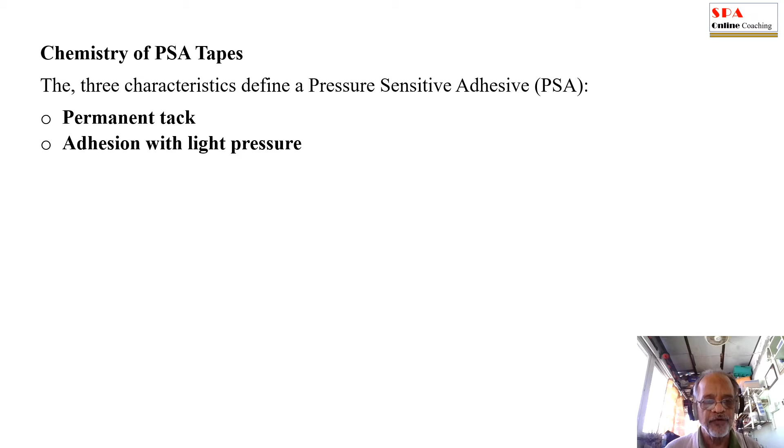The chemistry of PSA tapes. The three characteristics define a pressure sensitive adhesive: permanent tack, adhesion with light pressure, and no liquid to solid phase change. Unlike liquid adhesives, the chemistry in a tape is provided fully cured, so there is no additional curing that takes place to form a bond. The bond is created by using mechanical interlocking and electrostatic interactions at the interface.

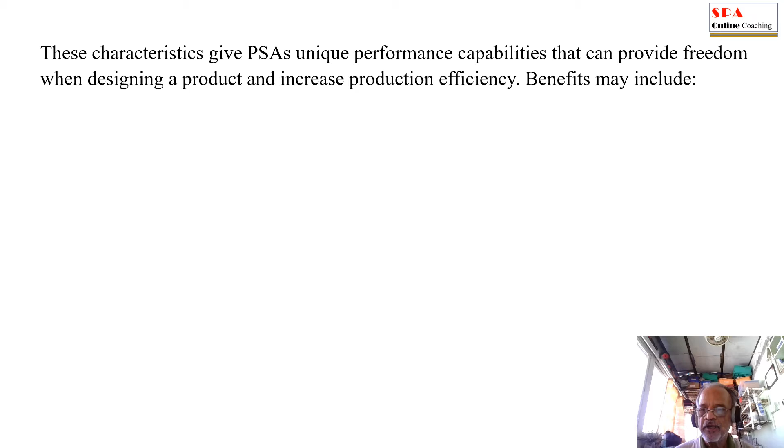These characteristics give PSAs unique performance capabilities that can provide freedom when designing a product and increase production efficiency. Benefits may include instant handling strength after applying pressure, easy to apply, consistent bond thickness, various thickness options with and without carriers, and functional foam cores,

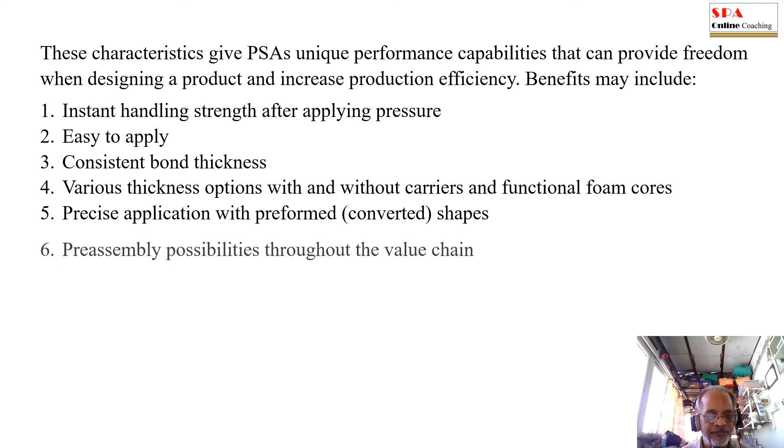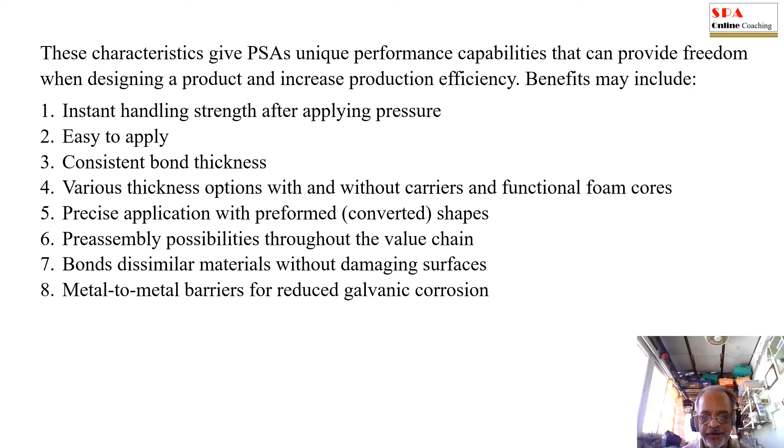precise application with preformed or converted shapes, pre-assembly possibilities throughout the value chain, bonds dissimilar materials without damaging surfaces, metal-to-metal barriers for reduced galvanic corrosion.

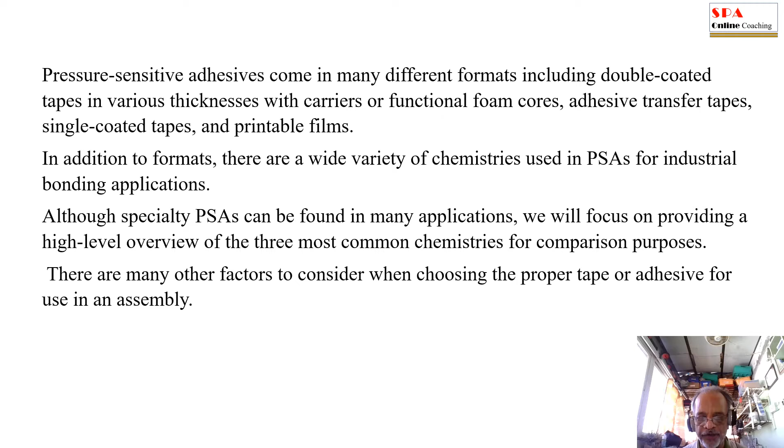Pressure-sensitive adhesives come in many different formats, including double-coated tapes in various thicknesses with carriers or functional foam cores, adhesive transfer tapes, single-coated tapes, and printable films. In addition to formats, there are a wide variety of chemistries used in PSAs for industrial bonding applications. Although specialty PSAs can be found in many applications, we will focus on providing a high-level overview of the three most common chemistries for comparison purposes. There are many other factors to consider when choosing the proper tape or adhesive for use in an assembly.

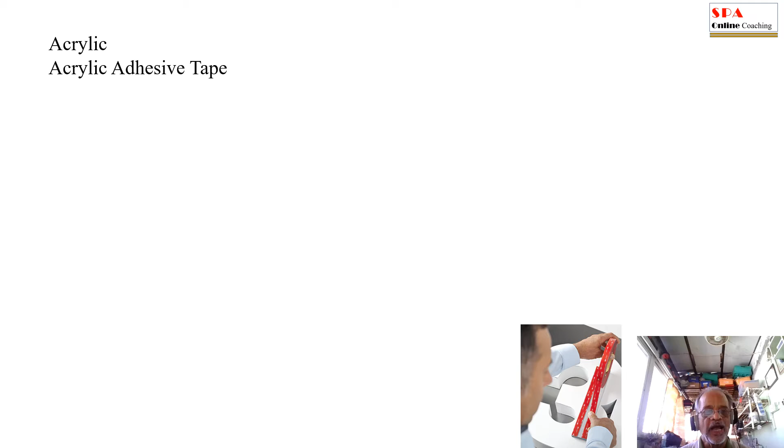Acrylic adhesive tape. The development of acrylics for pressure-sensitive adhesives began because of the tendency of natural rubber to yellow and degrade when exposed to UV, ultraviolet. Acrylic chemistry also tends to have higher internal strength than the rubber chemistry. Acrylic tapes are the workhorse of industrial bonding.

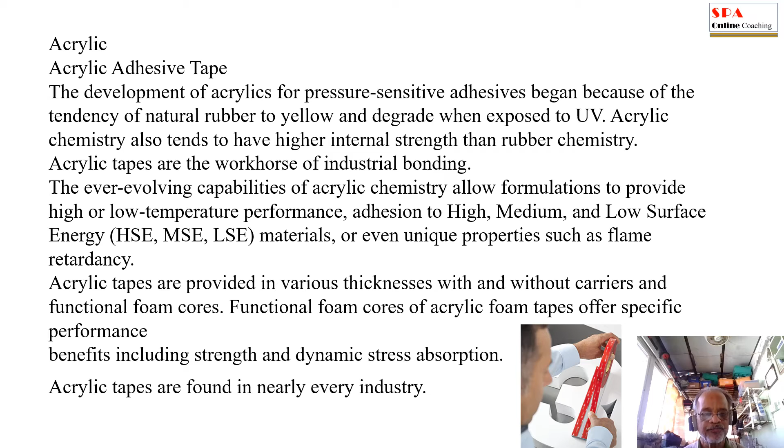The ever-evolving capabilities of acrylic chemistry allow formulations to provide high or low temperature performance, adhesion to high, medium, and low surface energy (HSE, MSE, LSE) materials, or even unique properties such as flame retardancy. Acrylic tapes are provided in various thicknesses with and without carriers, and functional foam cores of acrylic foam tape offer specific performance. Benefits include strength and dynamic stress absorption. Acrylic tapes are found in nearly every industry.

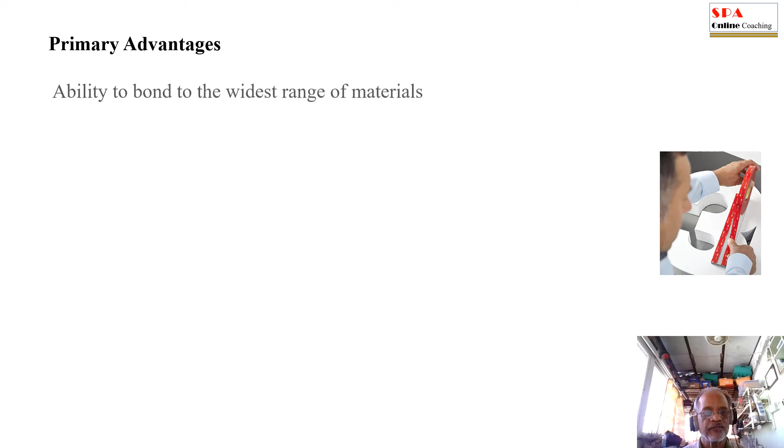Primary advantages: ability to bond to the widest range of materials, widest variety of mechanical performance capabilities, good resistance to aging and environmental conditions, functional acrylic foam cores available for dynamic stress and vibration absorption.

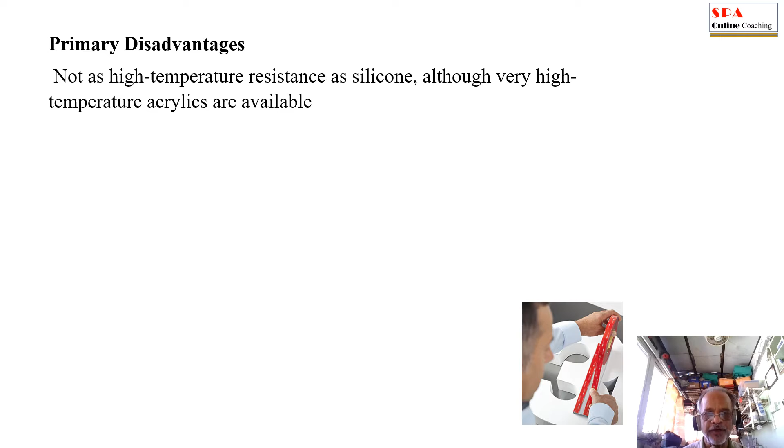Primary disadvantages: not as high temperature resistant as silicone, although very high temperature acrylics are available, but not to the extent of silicone adhesive. Longer time to full strength than rubber, although handling strength is typically immediate after pressure and final strength is typically higher.

Unlike acrylics used for liquid adhesives, the acrylic chemistry in a tape is provided fully cured, so there is no additional curing that takes place to form a bond. The bond is created by using mechanical interlocking and electrostatic interactions at the interface.

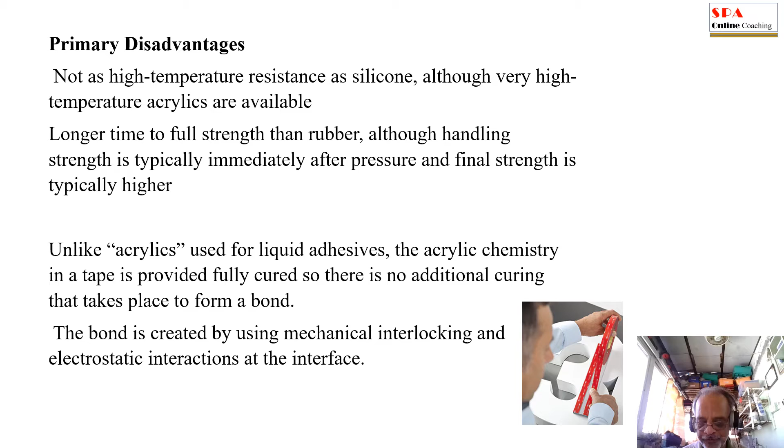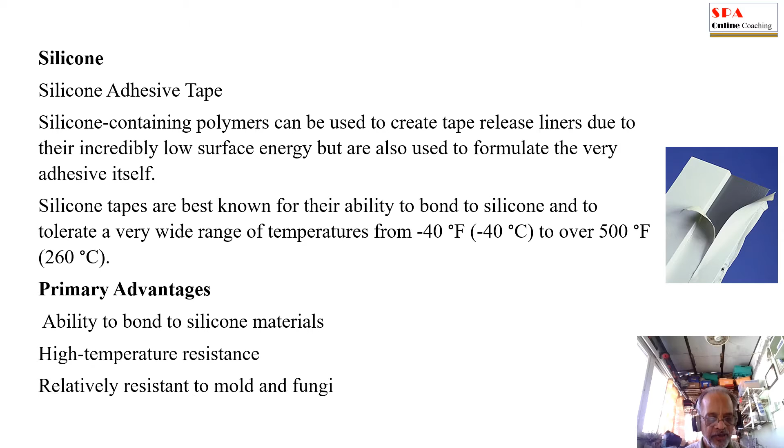Silicone adhesive tape. Silicone-containing polymers can be used to create tape release liners due to their incredibly low surface energy, but are also used to formulate the very adhesive itself. Silicone tapes are best known for their ability to bond to silicone and to tolerate a very wide range of temperatures, from minus 40 degrees Fahrenheit, that is minus 40 degrees centigrade, to over 500 degrees Fahrenheit or 260 degrees centigrade. Primary advantages: ability to bond to silicone materials, high temperature resistance, relatively resistant to mold and fungi.

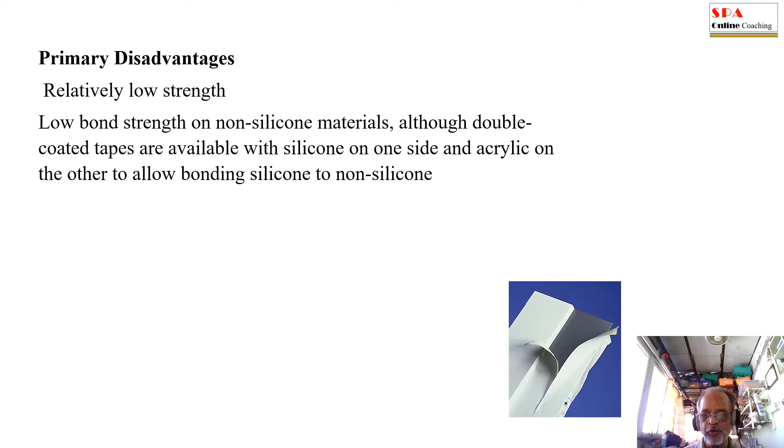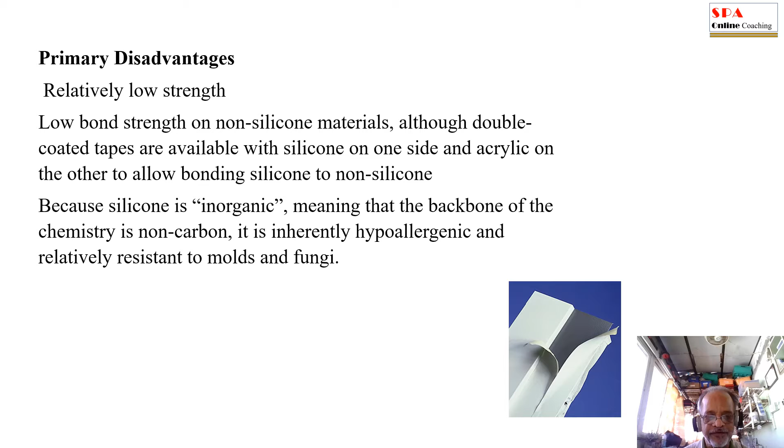The disadvantages are relatively low strength and low bond strength on non-silicone materials, although double-coated tapes are available with silicone on one side and acrylic on the other to allow bonding silicone to non-silicone. Because silicone is inorganic, meaning that the backbone of the chemistry is non-carbon, it is inherently hypoallergenic and relatively resistant to molds and fungi.

Rubber adhesive tapes. Rubber was the first material used to make pressure sensitive adhesives. Over the decades, rubber PSA technology has advanced to include both natural and synthetic rubber resins and a wide variety of tackifiers used to tune the adhesive for specific performance. Rubber adhesives build the bond faster than other chemistries. They can bond to most surfaces, including LSE, and are relatively low cost. They are a versatile option for many applications.

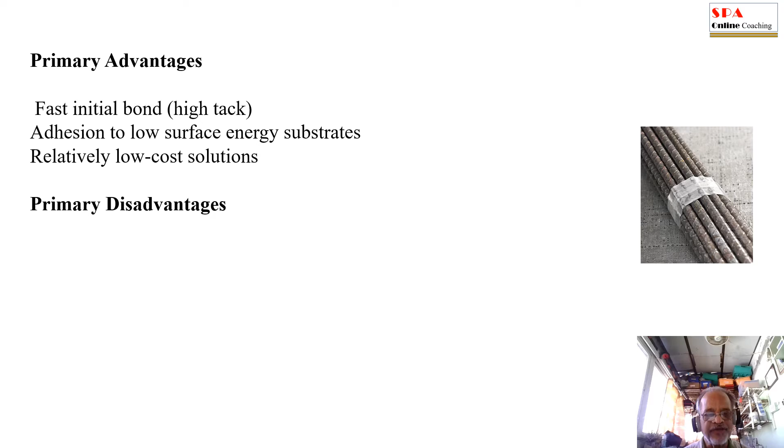However, their final bond strength is lower than acrylic PSAs and they are more vulnerable to the effects of aging, sunlight, and oxidation. The advantages are fast initial bond or high tack, adhesion to low surface energy surfaces, relatively low cost solutions. Disadvantages are lower ultimate strength compared to acrylic PSAs, and lower resistance to environmental conditions, that is UV and temperature.

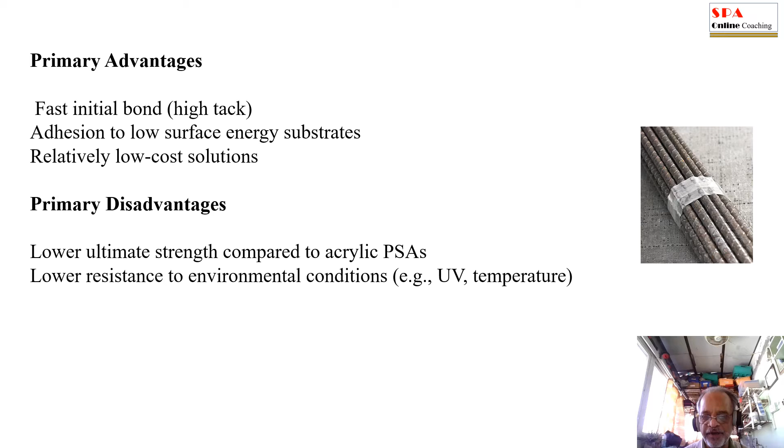Natural rubber, or polycis-isoprene, is mechanically worked to provide lower molecular weight polymers that can be readily dissolved or dispersed in a solvent. Synthetic polymers such as styrene-isoprene block copolymers may also be used.

Tackifiers such as pinene from pine sap, among other sources, are added to give the adhesive additional tackiness, allowing it to be used as a PSA.

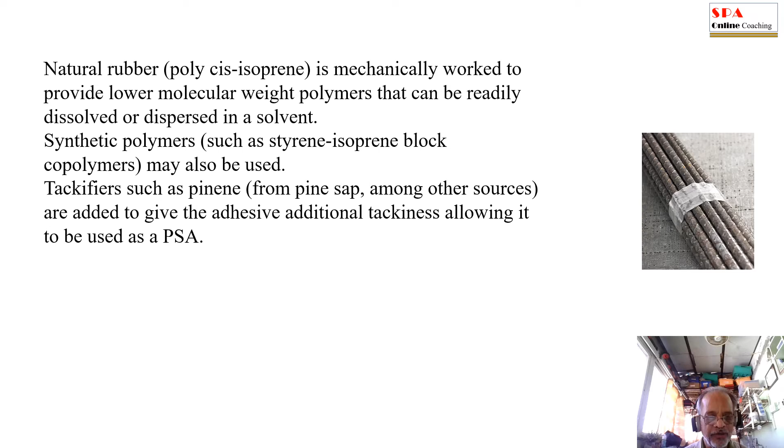Adhesion science. The principal requirement of an adhesive bond is to connect two materials while withstanding the stresses they will be subjected to in their use. Using adhesives is not as intuitive as it may seem. Adhesive science is a multidisciplinary field requiring a knowledge of chemistry and physics, mechanics and rheology, design and engineering.

The adhesive science, or the study of adhesion, consists of three equally essential parts which combine to form the basis of adhesive selection and adhesive engineering: the surface science, the joint geometry and adhesive chemistry, as shown in the figure below.

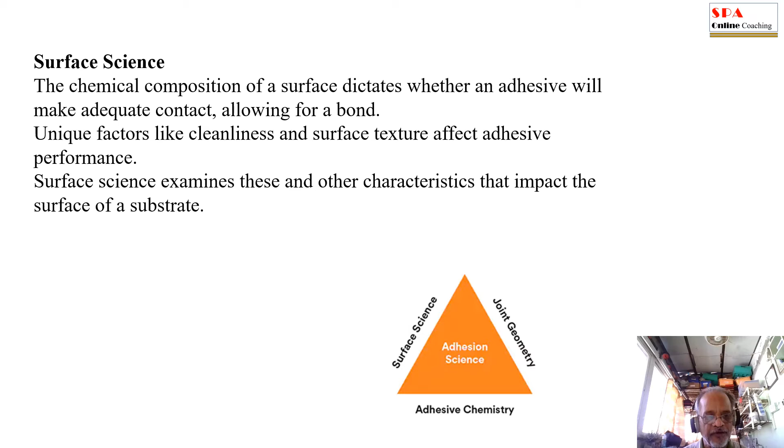The surface science. The chemical composition of a surface dictates whether an adhesive will make adequate contact to allow for a bond. Unique factors like cleanliness and surface texture affect adhesive performance. Surface science examines these and other characteristics that impact the surface of a substrate.

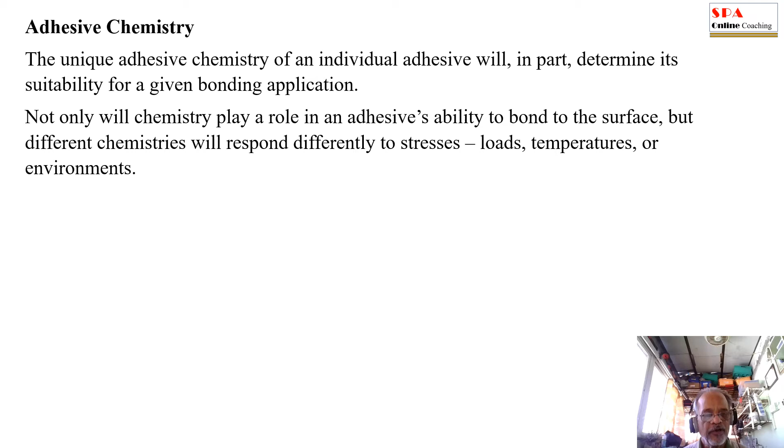Adhesive chemistry. The unique adhesive chemistry of an individual adhesive will in part determine its suitability for a given bonding application. Not only will chemistry play a role in an adhesive's ability to bond to the surface, but different chemistries will respond differently to stresses or loads, temperatures, or environment.

Joint geometry. Joint geometry, or the shape of a bond, will impact the performance of an adhesive bond, as will the direction and the intensity of the stresses. Not only do adhesives respond to the stress differently than mechanical or thermal fasteners, but different substrates and adhesive chemistries respond differently as well.

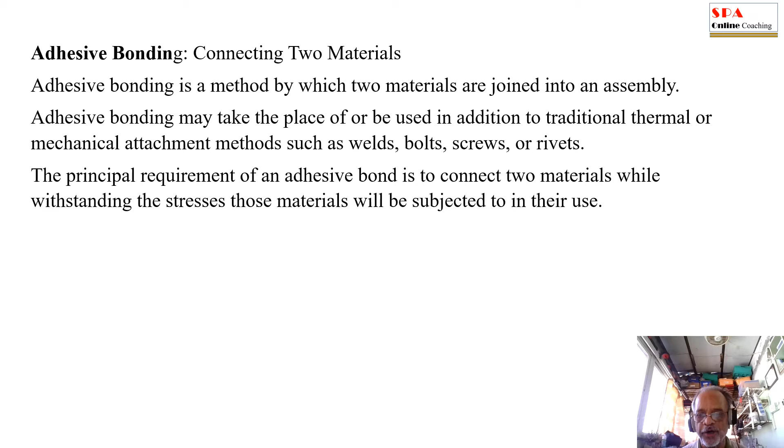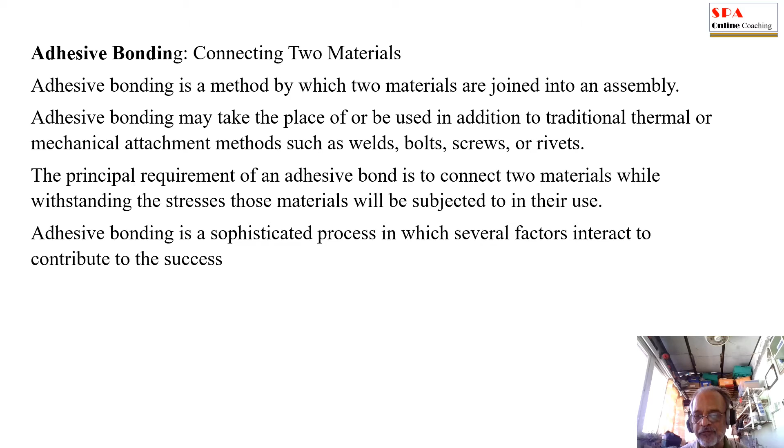Adhesive bonding, connecting two materials. Adhesive bonding is a method by which two materials are joined into an assembly. Adhesive bonding may take the place of or be used in addition to traditional thermal or mechanical attachment methods such as welds, bolts, screws, or rivets. The principal requirement of an adhesive bond is to connect two materials while withstanding the stresses those materials will be subjected to in their use. Adhesive bonding is a sophisticated process in which several factors interact to contribute to the success.

Adhesive bond strength. Adhesives and tapes offer unique benefits compared to welds and mechanical fasteners without sacrificing strength. Learn how adhesive bond strength is tested and measured and the many factors to consider when choosing an adhesive for an application. Measuring the strength of an adhesive bond. The most common way to measure adhesive bond strength is to pull the bond apart. An image of an adhesive bond being pulled apart is shown below.

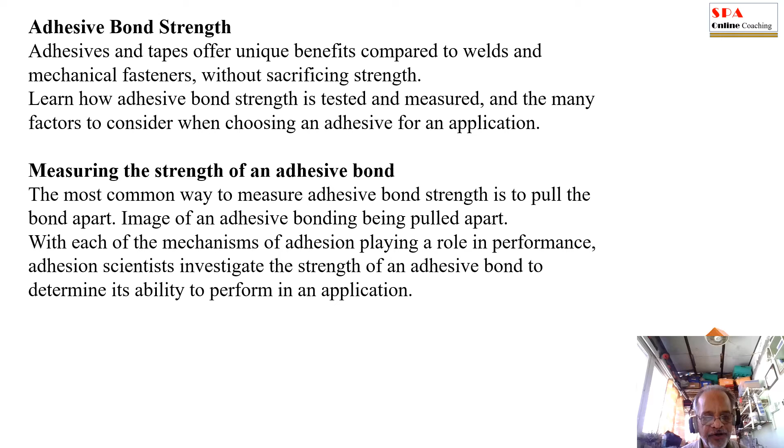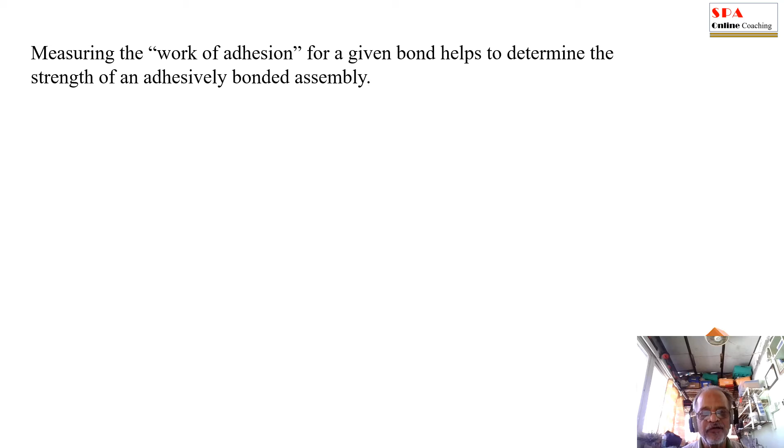With each of the mechanisms of adhesion playing a role in performance, adhesion scientists investigate the strength of an adhesive bond to determine its ability to perform in an application. Measuring the work of adhesion for a given bond helps to determine the strength of an adhesively bonded assembly. The most common way to measure this is to pull an adhesive bond apart. The force needed to pull the bond apart allows engineers to understand how the adhesive will perform in the application.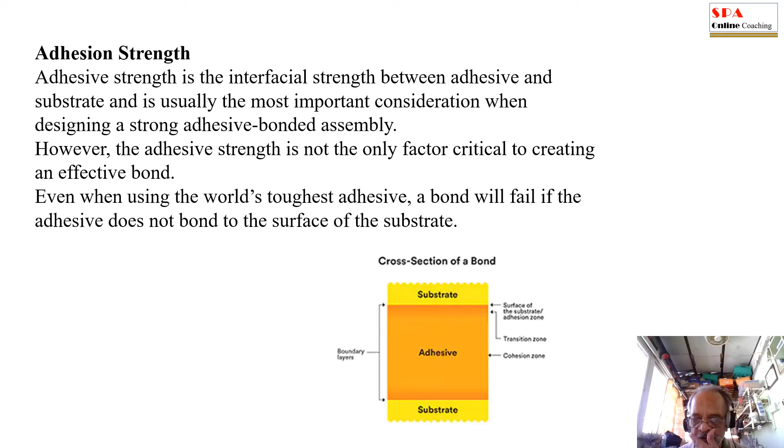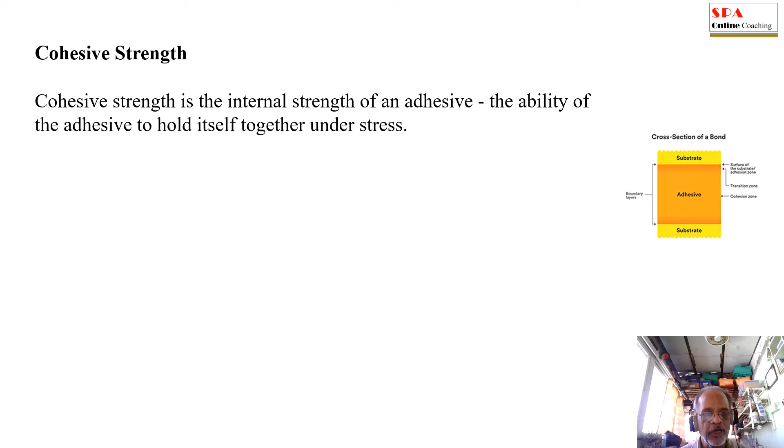Cohesive strength. Cohesive strength is the internal strength of an adhesive, the ability of the adhesive to hold itself together under stress. The higher the cohesive strength, the stronger the adhesive. Cohesive strength is determined by the chemical composition of the adhesive. The strength of adhesives covers a wide range, from pressure-sensitive adhesives to structural epoxy and acrylic adhesives.

It is important to consider the specific types of stress that will act on an adhesive joint. Common stresses include shear, peel, tensile, and cleavage. Knowing the magnitude and frequency of the stresses your application will be subjected to is helpful in choosing the adhesive with the best cohesive strength for the task at hand.

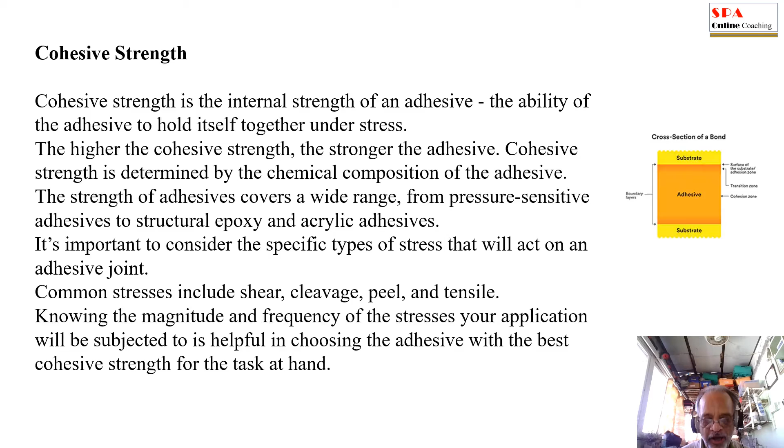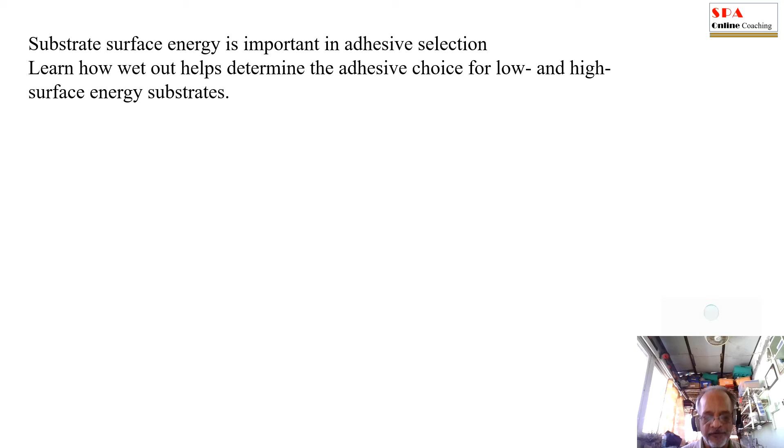Substrate surface energy is important in adhesive selection. Learn how wet out helps determine the adhesive choice for low and high surface energy substrates. Image of a droplet of water landing on a surface. The water spreads out to illustrate the high surface energy substrate.

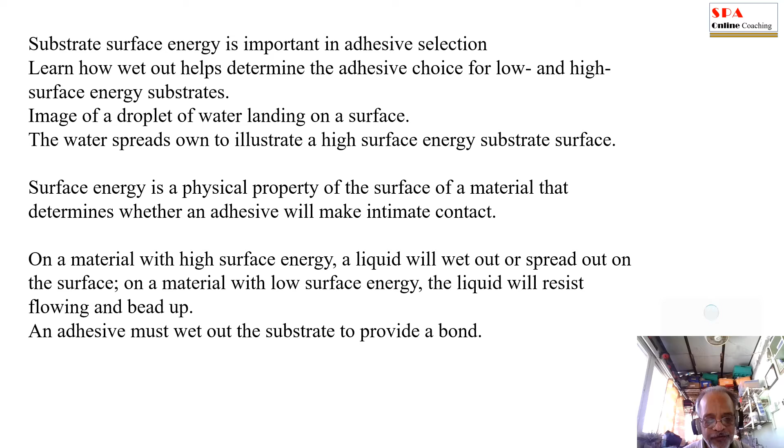The surface energy is a physical property of the surface of a material that determines whether an adhesive will make intimate contact. On a material with high surface energy, a liquid will wet out or spread out on the surface. On a material with low surface energy, the liquid will resist flowing and bead up. An adhesive must wet out the substrate to provide a bond. To choose the proper adhesive, it is important to understand the surface energies of all substrates in your assembly and how well the adhesive will wet out each.

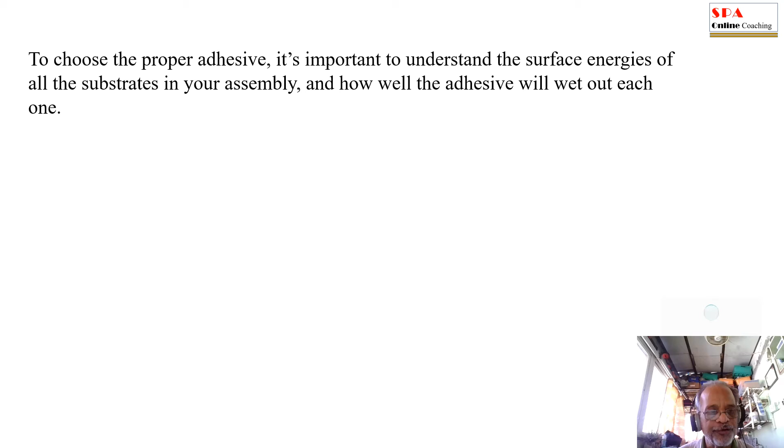Surface cleanliness must also be considered as some adhesives require a high degree of substrate cleanliness. How does adhesion work? To better understand how or why an adhesive will stick to a surface, it helps to understand the mechanism of adhesion. There are four commonly recognized methods through which adhesives and tape will bond to a substrate surface.

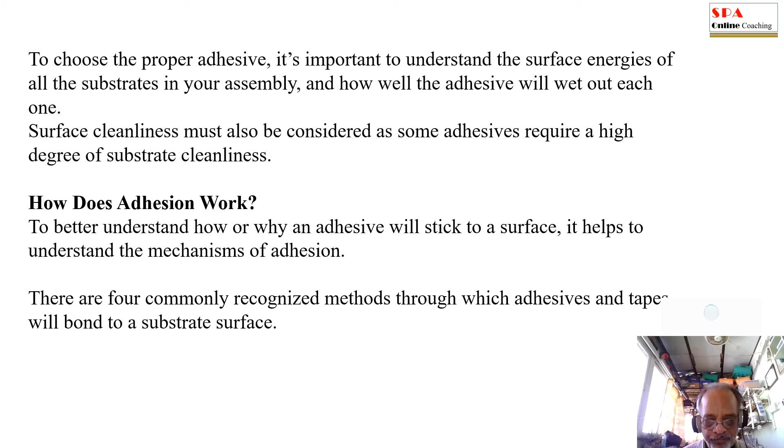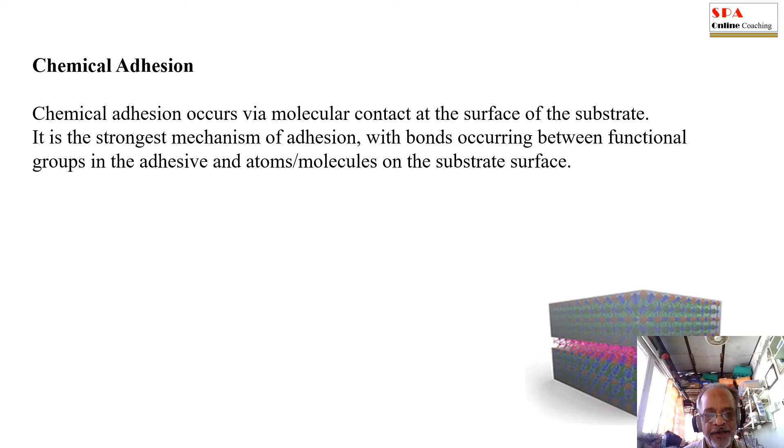Chemical adhesion. Here is a figure at the bottom side of the slide. The chemical adhesion occurs via molecular contact at the surface of the substrate. It is the strongest mechanism of adhesion with bonds occurring between functional groups in the adhesive and atoms or molecules on the substrate surface. This mechanism contributes to the structural strength of many adhesives such as epoxies bonding aluminum.

Chemical adhesion is the strongest mechanism of adhesion and occurs at the molecular level. Graphic illustrating chemical adhesion is shown below.

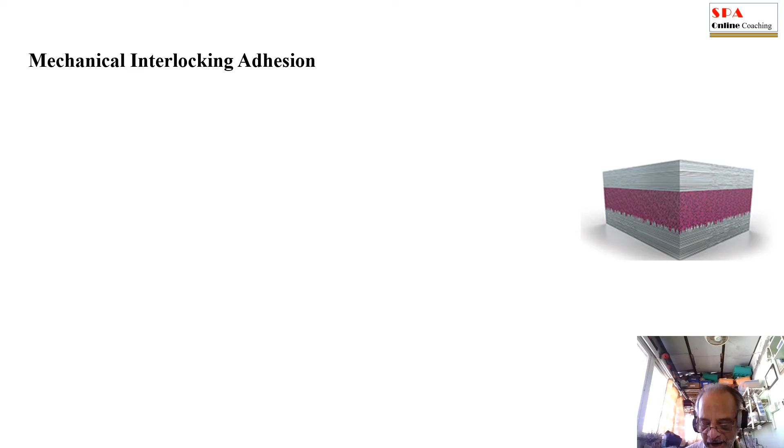Mechanical interlocking of adhesion. Mechanical interlocking occurs as the adhesive flows into the pores of the substrate's surface. The interlocking provides a physical impediment to crack propagation at the interface. It also serves to increase surface area, increasing total contact between adhesive and substrate.

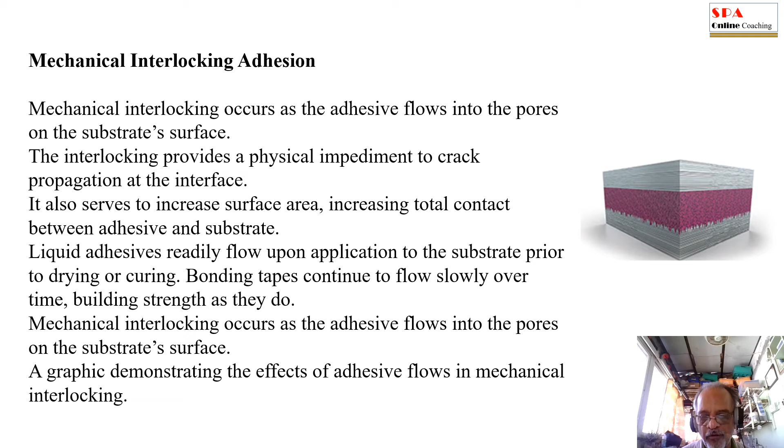Liquid adhesives readily flow upon application to the substrate prior to drying or curing. Bonding tapes continue to flow slowly over time, building strength as they do. Mechanical interlocking occurs as the adhesive flows into the pores on the substrate's surface. A graphic demonstrating the effect of adhesive flows in mechanical interlocking is shown below.

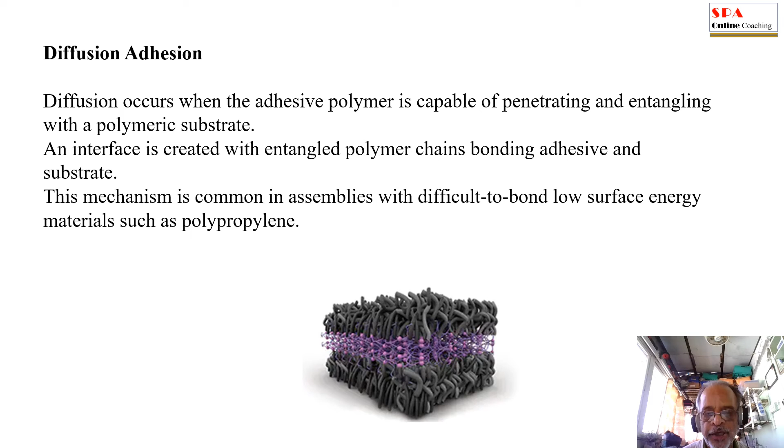Diffusion adhesion. Diffusion occurs when the adhesive polymer is capable of penetrating and entangling with the polymeric substrate. An interface is created with entangled polymer chains bonding adhesive and substrate. This mechanism is common in assemblies with different or difficult to bond low surface energy materials such as polypropylene. Diffusion adhesion is common in assemblies with difficult to bond low surface energy materials. Graphic illustrating the diffusion mechanics is as per the diagram.

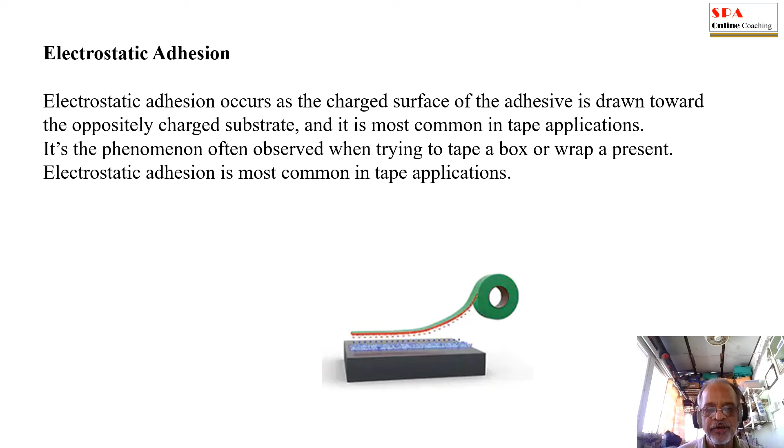Electrostatic adhesion. Electrostatic adhesion occurs as the charged surface of the adhesive is drawn towards the oppositely charged substrate, and it is most common in tape applications. It's a phenomenon often observed when trying to tape a box or wrap a present. Electrostatic adhesion is most common in tape applications. Graphic illustrating electrostatic adhesion of the tape and substrate is shown below.

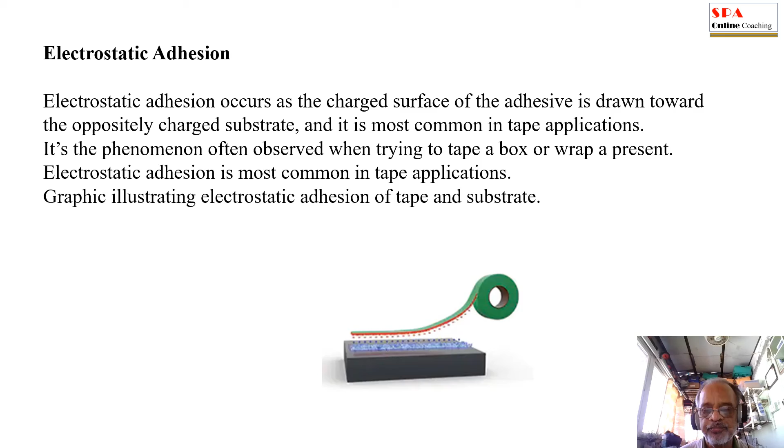Pressure-sensitive adhesive chemistries. Henkel manufactures a range of pressure-sensitive adhesives. These products allow businesses to improve efficiency and meet the demand of customers. There are many different types of pressure-sensitive adhesive chemistries on the market. Major types of pressure-sensitive adhesives are solvent acrylic pressure-sensitive adhesive, emulsion acrylic pressure-sensitive adhesives, solvent rubber pressure-sensitive adhesive, rubber-based hot melt pressure-sensitive adhesive, UV curable pressure-sensitive adhesive.

PSAs are commonly used to make various types of labels and tapes. These products are used across several industries including automotive, food production and packaging, electronics, and medical supply.

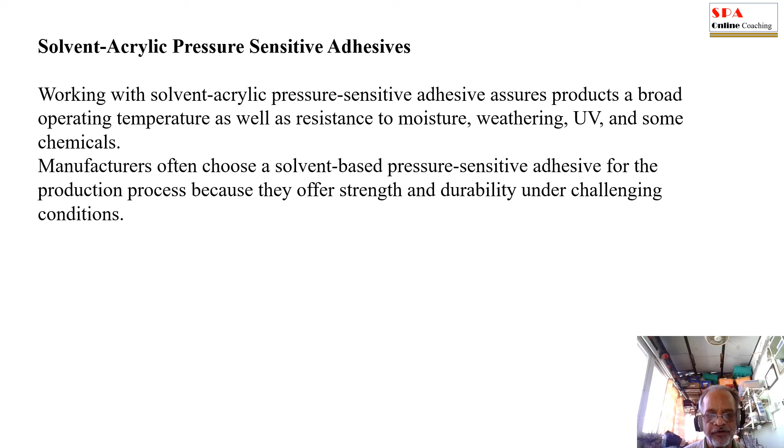Solvent pressure-sensitive adhesives. Working with solvent-based acrylic adhesives assures products a broad operating temperature as well as resistance to moisture, weathering, UV, and some chemicals. Manufacturers often choose a solvent-based PSA for their production process because they offer strength and durability under challenging conditions. Resistance to weathering and chemical exposure and tolerant towards UV.

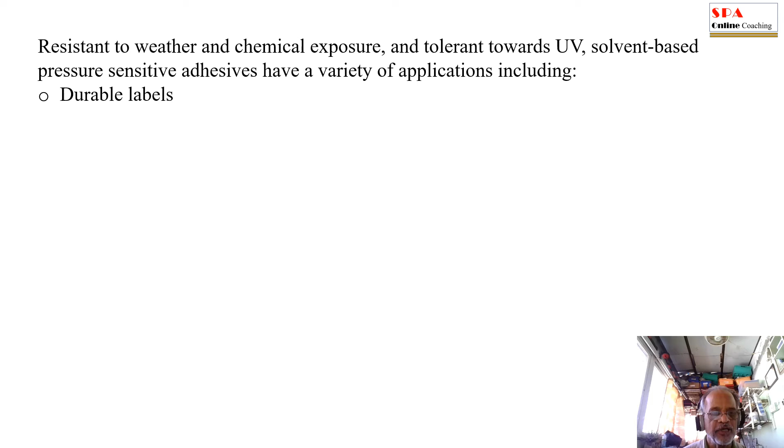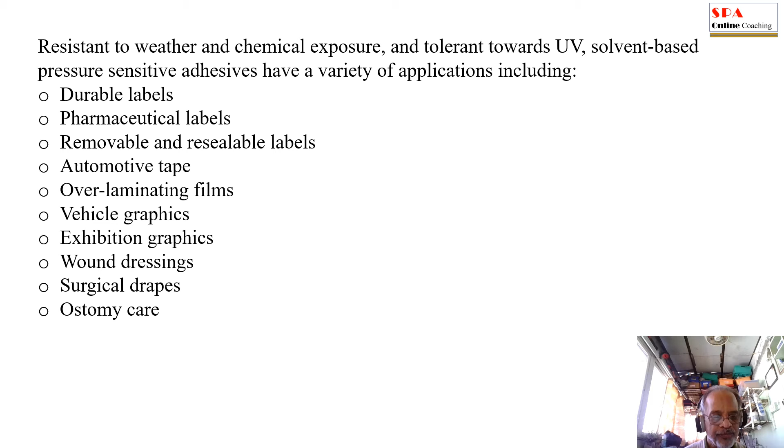Solvent-based PSAs have a variety of applications including durable labels, pharmaceutical labels, removable and resealable labels, automotive tapes, over-laminating films, vehicle graphics, exhibition graphics, wound dressing, surgical drapes, ostomy care. These PSA adhesives support applications that need to withstand extreme temperatures and chemical contact. Manufacturers need the adhesive to adhere to various substrates under the most extreme conditions to protect their customers.

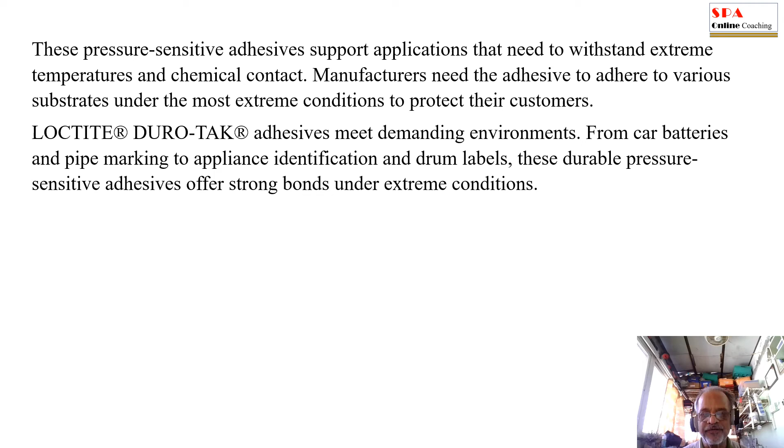Loctite adhesives meet demanding environments from car batteries and pipe marking to appliance identification, drum labels. These durable PSA adhesives offer strong bonds under extreme conditions.

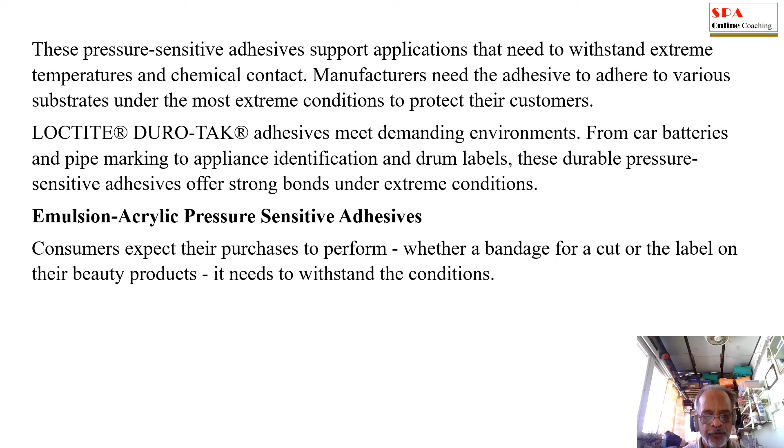Emulsion acrylic PSAs. Consumers expect their purchases to perform, whether a bandage for a cut or the label on a beauty product. It needs to withstand the conditions. Emulsion acrylic PSAs are versatile and provide lower operating temperatures, better UV stability, and improved clarity over other formulations. Their applications will withstand moisture and temperature changes to deliver no matter the application.

Henkel's range of emulsion acrylic PSAs is used across many industries. The adhesives are coater ready and provide advanced bonding and excellent results. Henkel water-based PSAs are commonly used to manufacture products such as no-look or clear labels, general purpose permanent labels, pharmaceutical labels, removable and resealable labels, foam tape, mounting tape.

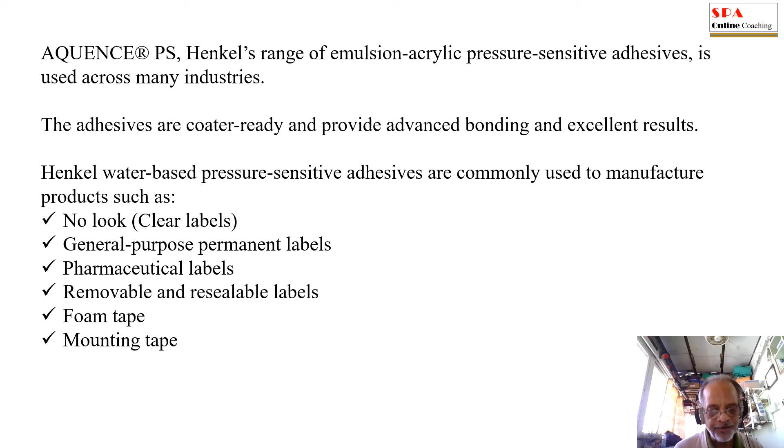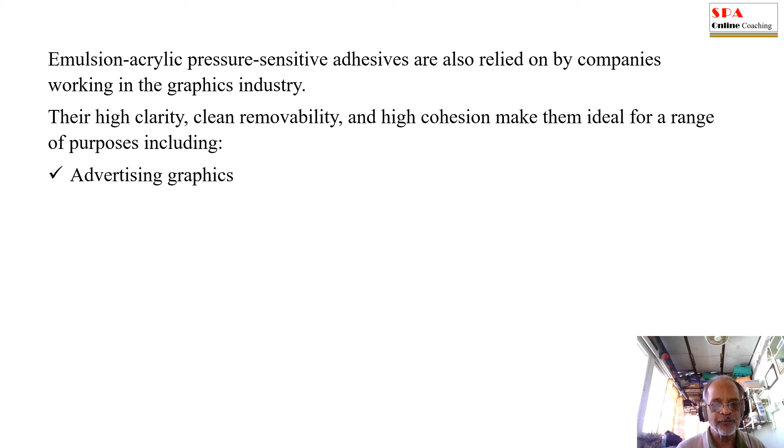Emulsion acrylic PSAs are also relied on by companies working in the graphic industry. Their high clarity, clean removability, and high cohesion make them ideal for a range of purposes including advertising graphics, removable protective film, exhibition graphics, architecture or corporate graphics.

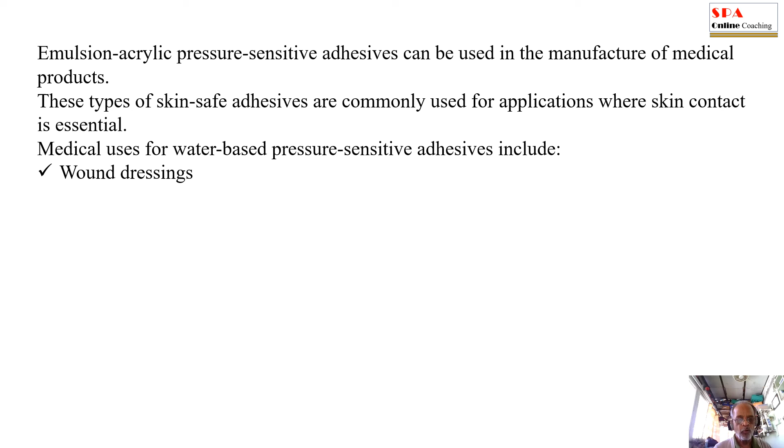Emulsion acrylic PSAs can be used in the manufacture of medical products. These types of skin-safe adhesives are commonly used for applications where skin contact is essential. Medical uses for water-based PSAs include wound dressings, bandages, and medical tapes.

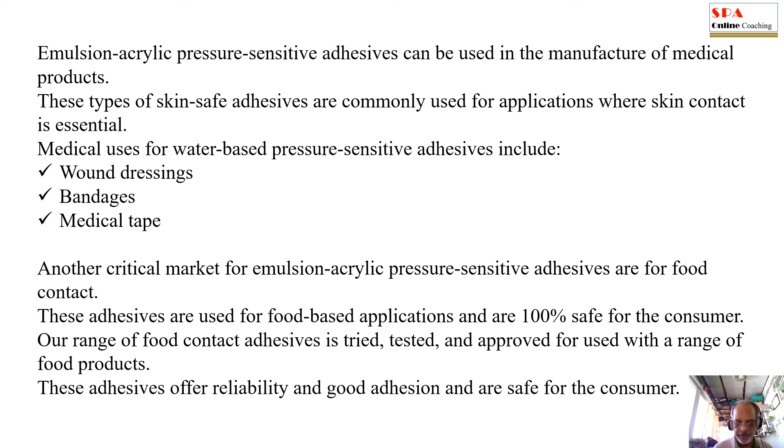Another critical market for emulsion acrylic PSAs is food contact. These adhesives are used for food-based applications and are 100% safe for the consumer. The range of food contact adhesives is tried, tested, and approved for use with a range of food products. These adhesives offer reliability and good adhesion and are safe for consumers.

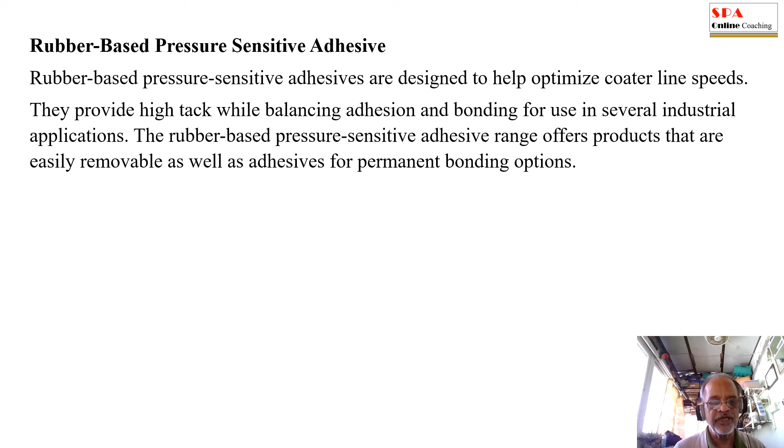Rubber-based PSAs. Rubber-based PSAs are designed to help optimize coater line speeds. They provide high tack while balancing adhesion and bonding for use in several industrial applications. The rubber-based adhesives range offers products that are easily removable as well as adhesives for permanent bonding options.

The Technomelt range of products contains some of the most reliable hot melt adhesives on the market, designed to optimize coater line speed in PSA applications. The adhesives offer superior cost in use and are known for their quality, reliability, and efficiency. The products in the hot melt pressure sensitive range are suitable for use in a number of industries.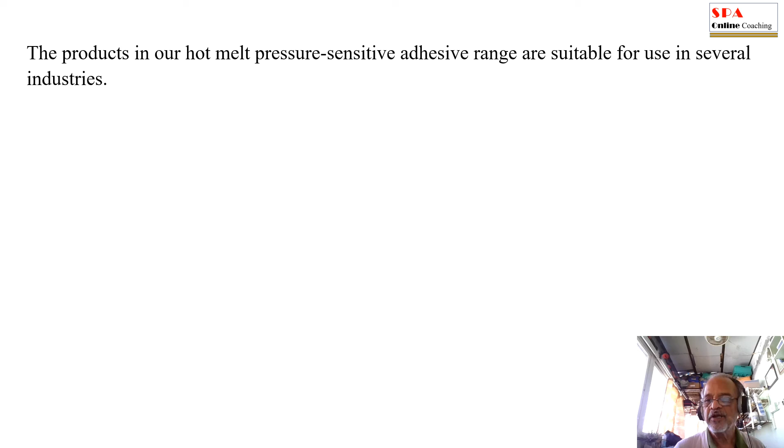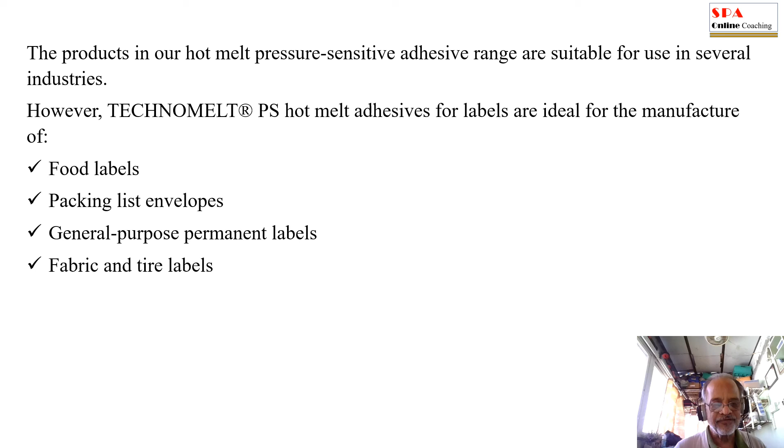Technomelt hot melt adhesives for labels are ideal for manufacturing of food labels, packing list envelopes, general purpose permanent labels, fabric and tire labels, removable and resealable labels, and specialty labels.

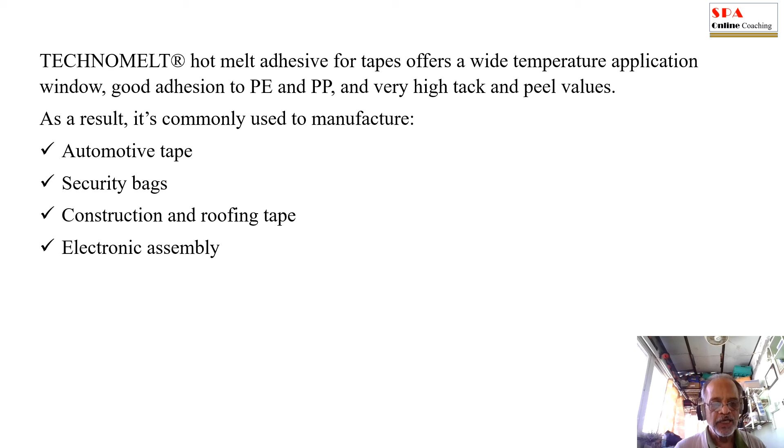Technomelt hot melt adhesives for tapes offer wide temperature application windows, good adhesion to PE and PP, and very high tack and peel values. As a result, they're commonly used to manufacture automotive tapes, security bags, construction and roofing tapes, electronic assembly, general purpose permanent tape, hook and loop tape, and instant sticky tapes.

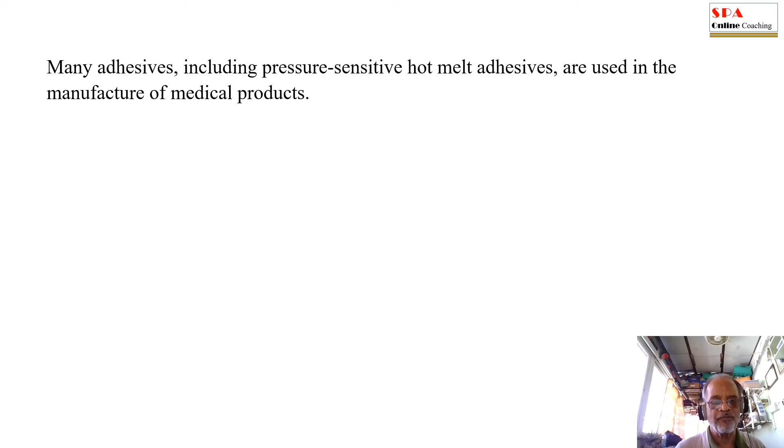Many adhesives, including PSA hot melt adhesives, are used in the manufacture of medical products. Technomelt hot melt PSAs for medical applications, approved for skin contact, have good anchorage to various medical substrates and have clean removability. They are used in production of wound dressings, bandages, and medical tapes.

UV pressure sensitive adhesives. UV curable PSA adhesives give you freedom to offer more options and catch the attention of consumers. UV curable PSAs enable heavier coat weights at high line speeds, optimizing productivity for thicker tapes. Superior clarity enables no-look labels with the coating benefits of 100% solids technology.

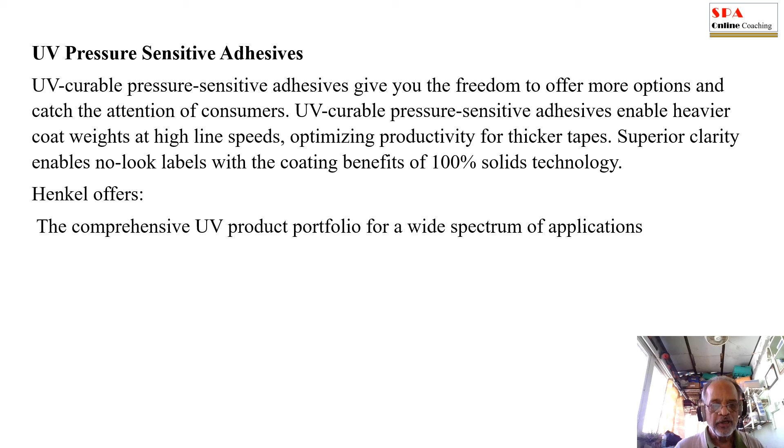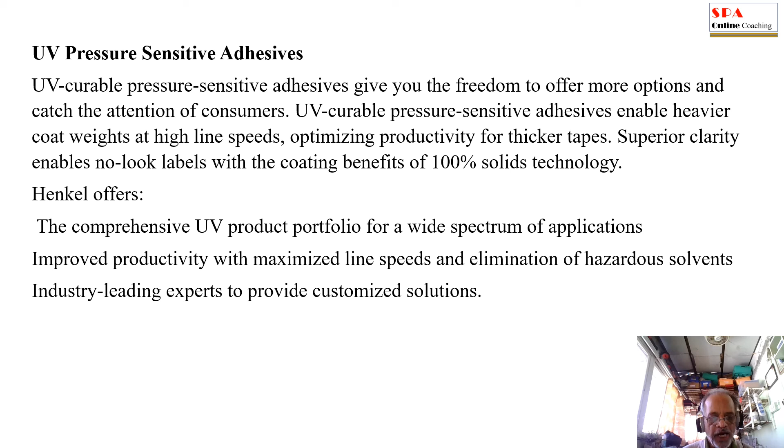Henkel offers a comprehensive UV product portfolio for a wide spectrum of applications, improved productivity with maximized line speeds, elimination of hazardous solvents, and industry-leading experts to provide customized solutions.

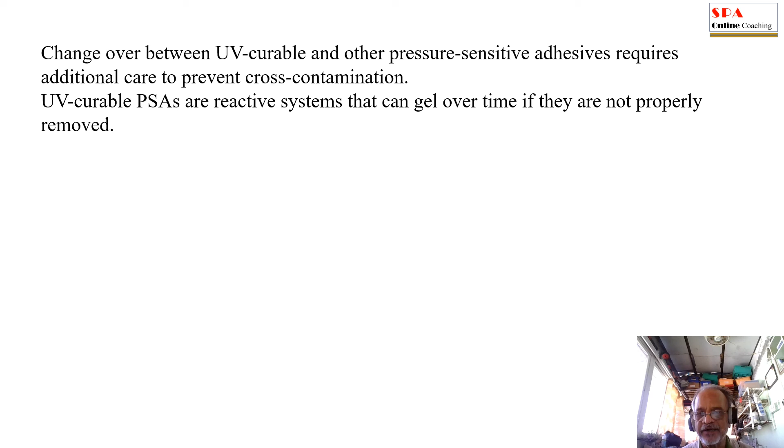Changeover between UV curable and other PSA adhesives requires additional care to prevent cross contamination. UV curable PSAs are reactive systems that can gel over time if they are not properly removed. Proper and regular cleaning of the melt tank and hoses will reduce the adhesive buildup on equipment surfaces and minimize production downtime.

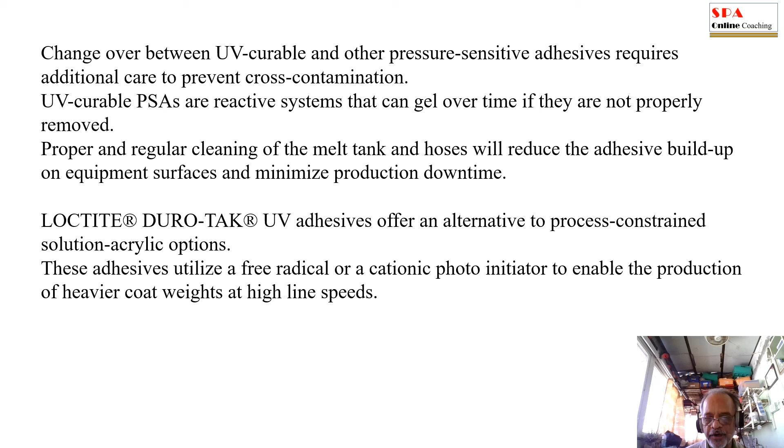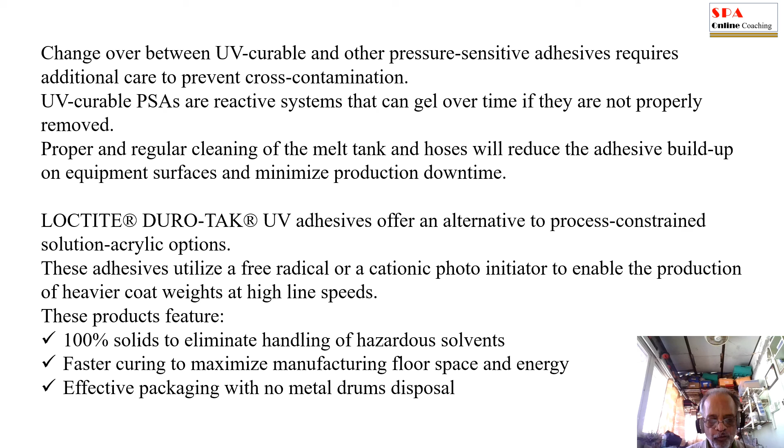Loctite adhesives offer an alternative to process-constrained solution acrylic options. These adhesives utilize a free radical or cationic photoinitiator to enable the production of heavier coat weights at high line speeds. These products feature 100% solids to eliminate handling hazardous solvents, faster curing to maximize manufacturing floor space and energy, and effective packaging with no metal drum disposal.

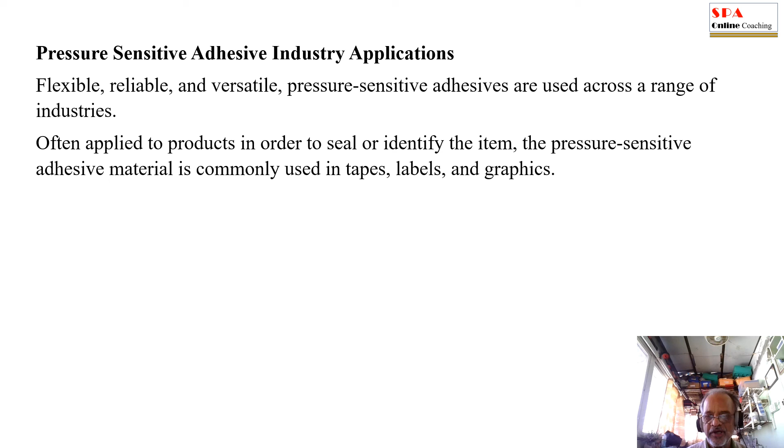PSA industry applications: flexible, reliable, and versatile PSA adhesives are used across a range of industries, often applied to products in order to seal or identify the item. The PSA material is commonly used in tapes, labels, and graphics. This type of skin-safe adhesive is also used to make several medical supplies, including bandages and wound dressings, with the importance of skin contact and sensitivity in mind.

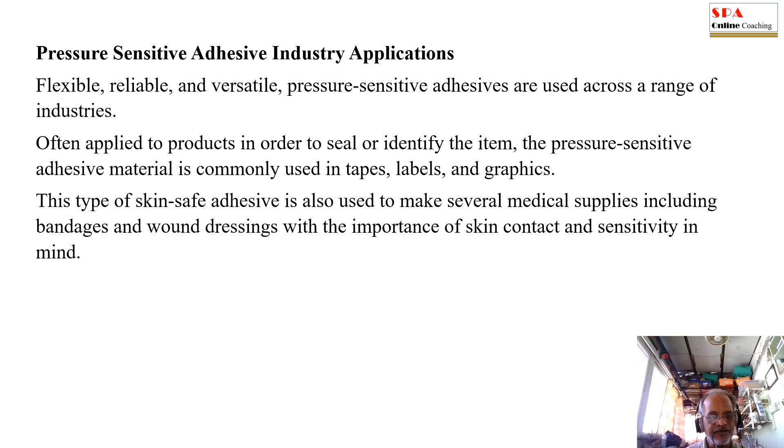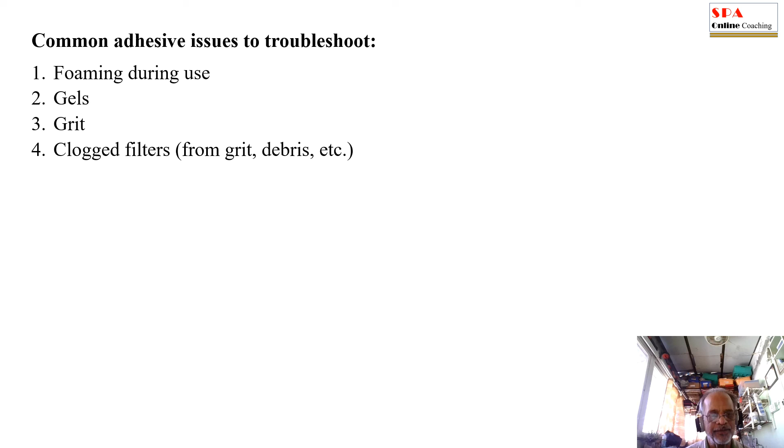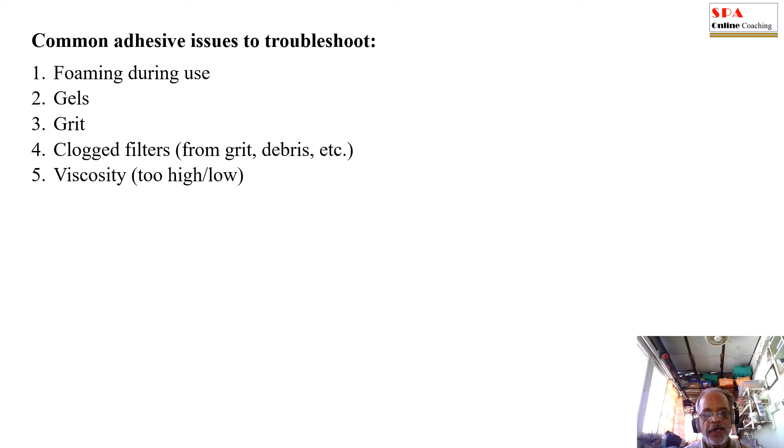Common adhesive issues to troubleshoot: foaming during use, gels or gel formation, grit or contamination, clogging filters due to debris, dust, or grit, viscosity too high or too low. In case of solvent-based, the viscosity may gradually go high due to evaporation of solvent. In case of hot melts, it can go high if the adhesive is cooled down.

Solids too high can cause adhesive buildup and coating issues. Freezing of the coating or adhesive may also cause trouble. Skinning: in case of water-based adhesive, skinning is always a big problem. Mixing to ensure homogeneity prior to use. Pump problems, getting adhesive from tote or drum to the coater.

How to best clean up, flushing all the lines, changing the adhesive or cleaning. How to address clogged lines, separation of adhesive. Smell usually indicates biogrowth if the adhesive is stored for a long time.

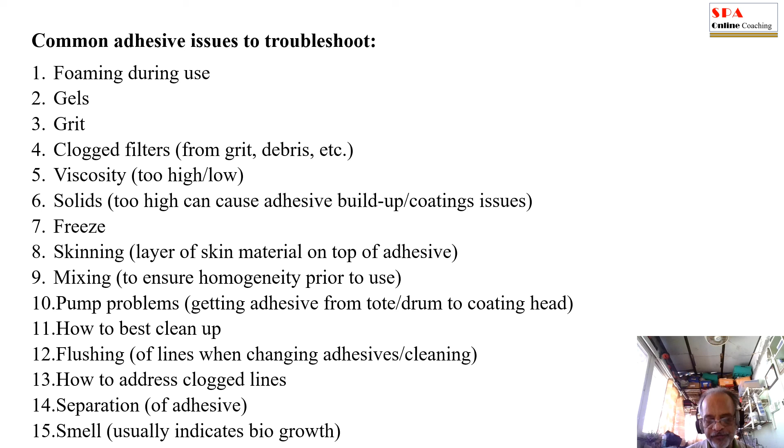So this was a presentation on the chemistry of PSAs.